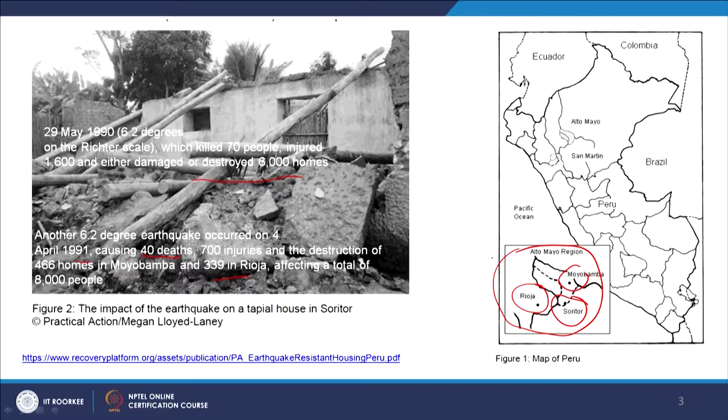This work has been carried out with the Practical Action group, which focuses mostly on the recovery process, mainly long-term reconstruction rather than short-term relief.

How did they account for the beneficiaries? Based on various surveys and feedback from local residents and leaders, they calculated the whole expenditure and conducted a needs assessment, then identified the potential beneficiaries.

From the architectural aspect, after consultation with local leaders and various stakeholders in the region, they decided to discard the use of rammed earth and adobe, promoting the Quincha timber frame instead as a better earthquake resistant material. The Practical Action group developed a plan with timber posts in between, called Quincha Construction.

This involves timber studs embedded either in the concrete bedding or deeper into the foundation. The whole wall works like wattle and daub: a bamboo screen is woven, then a first coat of render is applied, followed by a second coat of render on the bamboo screen.

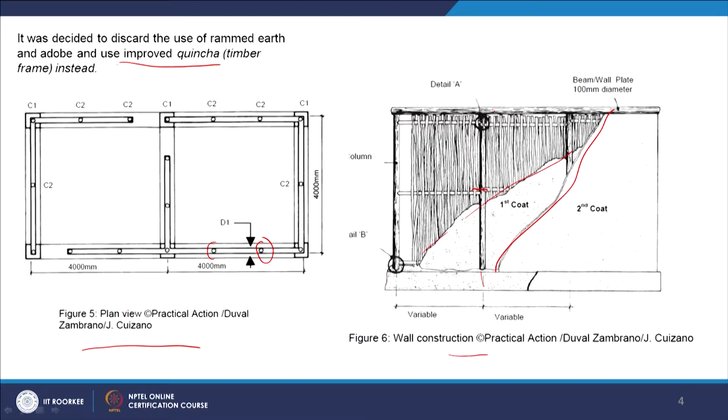If you look at detail A, this junction and this junction, so these are the two junctions. Now you have the 100 mm diameter, and the horizontal stud is embedded within it, and there is also a recess at the bottom, so it goes into the wall base, as well as 50 mm diameter, so it fixes the horizontal stud as well. So this is the kind of detail that has been implemented.

The technical group also suggested various specifications: concrete pad and strip foundations should have a mix of 1:10 cement plus aggregate, plus 30% of large stones, and concrete wall base with a mix of 1:8 cement and aggregate, and wood of structural quality poles.

In the render, again they have mixed the first coat of mud to straw, which is 100 kg and 50 kg, and the second coat is cement to lime, sand, or sieved soil as per the standards. So this is 1:1:5, or cement to gypsum sand. This is again all by volume.

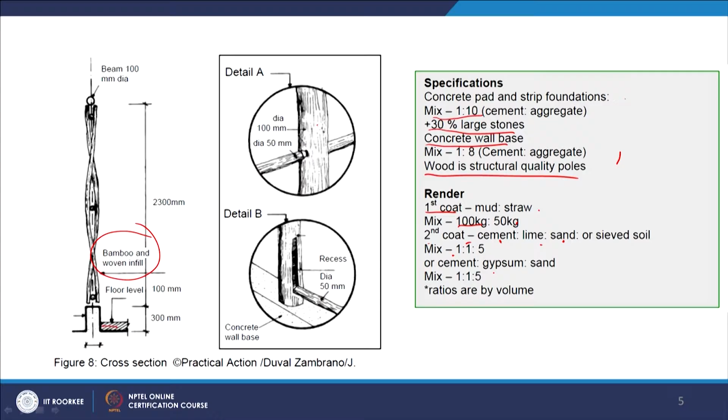And what are the benefits of this Quincha construction? One is they have upgraded this type of construction and also embedded the concrete aspect, the concrete foundations. They provided the concrete foundations, which can give greater stability towards earthquakes.

Then the wooden columns are treated with tar or pitch to protect against humidity, concreted into the ground with nails. You can see here these nails have been embedded at the base to give extra anchorage, and concrete wall bases are used to prevent humidity affecting the wood and canes in the walls, and similarly careful jointing between the columns and beams improves structural integrity.

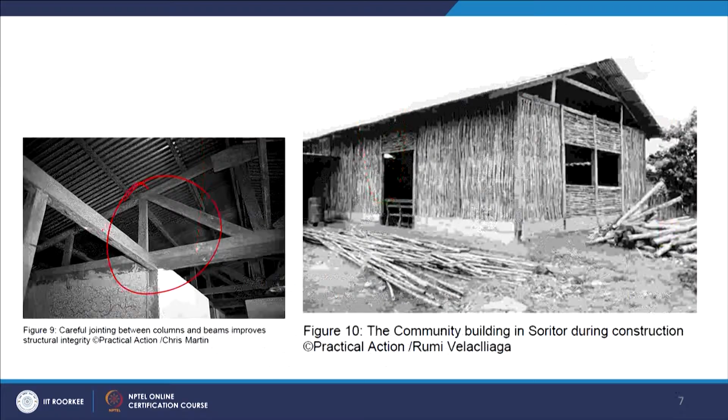That is where you see in the next slide the joining of the beams and columns, how carefully they have done it, because that is where it ties the whole building in, and makes sure the whole structure acts better in terms of the earthquake, when an earthquake happens.

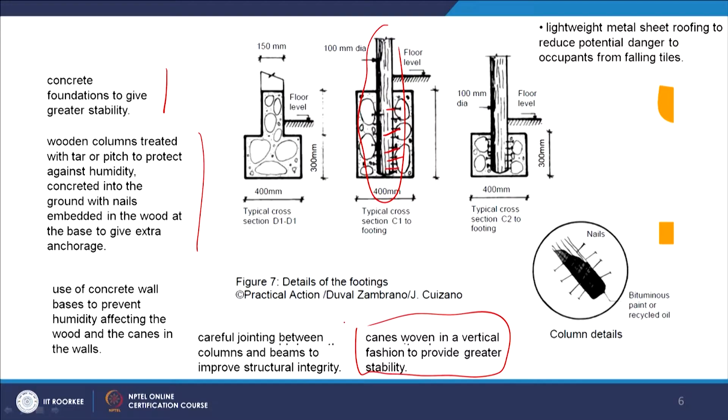And because the canes are woven in a fashion, it not only gives the aesthetic character of it, but it also gives a kind of structural stability.

In terms of roof, there has been a lightweight, probably galvanized metal sheet roofing, to reduce potential danger from falling tiles. Earlier there were tiles or Adobe roofs, so when the building shakes, the stones used to fall down on the people. That is why they thought of going for lightweight materials.

What you can see is a community building in the Soritor area. What they did was try to upgrade this technology. First, they tried to construct public buildings like schools or community buildings, so that people get some awareness of this technology, and they could also train the local people.

They could also give some training sessions or masonry training sessions to the local people, so that it could be spread out to other places as well. The way they developed it is basically 20 to 40 people in a team, and then they start working, they get training, and they have been implementing it in different sites. So this is how the methodology has been done.

Now you have the identification of the beneficiaries and the first contacts. Then you have the characteristics of the beneficiaries, how one figures out these beneficiaries.

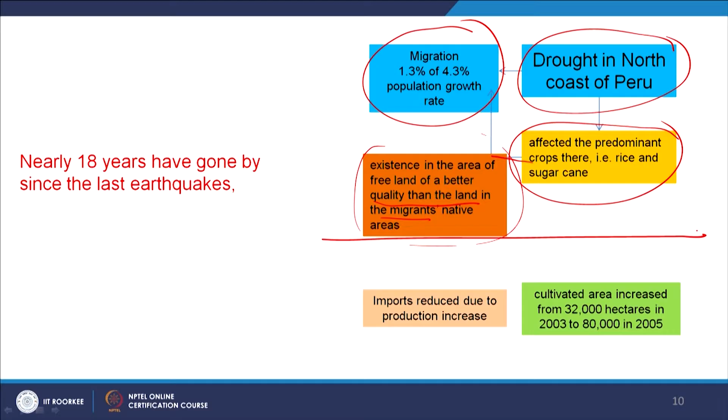About 1994, when we see the migration, out of 4.3% population growth, 1.3% was contributed by the migrant population. Considering these conditions, the government was motivated and encouraged to enhance the production of feasible cultivated areas. So that is where they also promoted certain schemes and encouraged people to work on the possible cultivated areas.

So from 32,000 hectares in 2003, it became 80,000 hectares in 2005. It has more than doubled, and that has actually increased production, and obviously imports from other places have decreased. So this is one of the important considerations, because people are getting a better economic status.

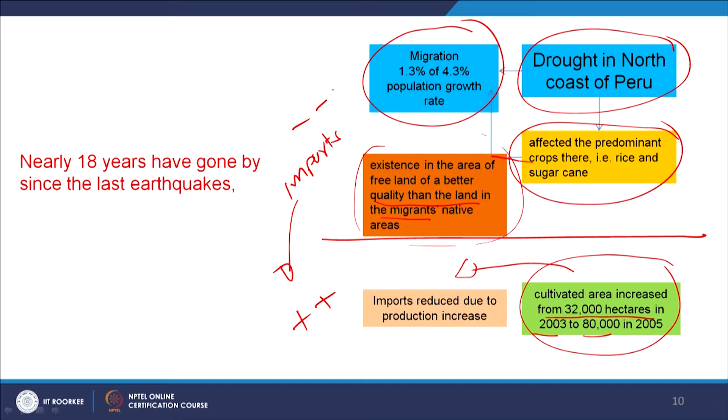So now, though initially it started with a very participatory approach, because the economic status is making them independent, they are able to take some decisions on their own. And earlier local government was not playing a part, but now gradually local government has also taken part in the whole process, and the economic status is actually supporting that.

They have not concentrated much on the public spaces. So the migrants have also created problems. They started settling down on plots and outskirts of the towns, increasing their savings, and thus creating a demand for more housing.

The more migration is started coming up, that is where the demand of housing and services increases, which means they're forming new settlements without any previous planning.

And this is where one of the important aspects is deforestation. It says 1.33 million hectares have been deforested with this migration process, and nearly 27% of the total area has been affected.

This comprises 27% of the total area that has been deforested. And now that is where we are talking about the indirect impact on climate change aspects, which may result in the shortage of water, which will again turn into a cycle impacting agriculture.

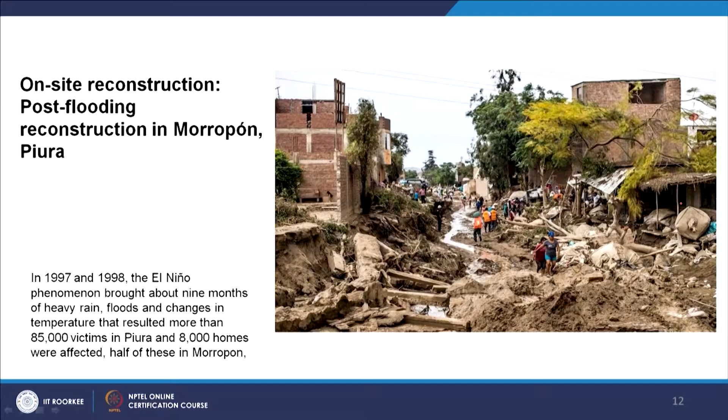Being an agricultural sector, this particular region is rich in agriculture. So in the reconstruction process, they looked at how to prevent further water shortage, and dams and irrigation projects have been built.

Also for housing, the construction system used concrete foundations with 1 meter footings to prevent possible floods, built with improved Quincha. Again, they used the Quincha timber frame with the active participation of the local population and materials.

So even here the participation has been incorporated, using local materials. Now, being an agricultural area, the whole idea of urban planning is to reduce the vulnerability and centralize water and services, and this is where all the housing complexes are built on about 200 square meter plots.

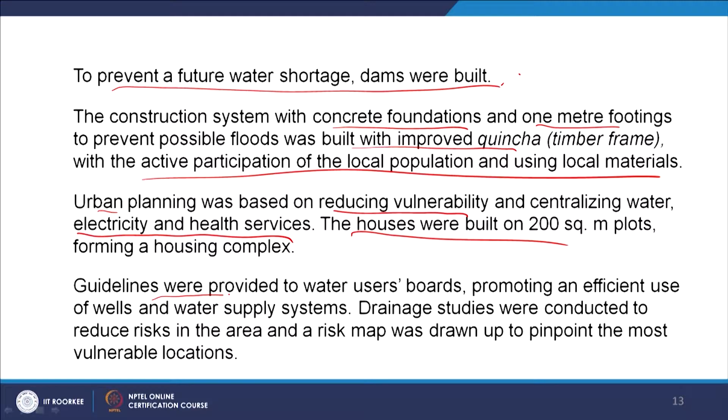They have also been provided with certain technical guidelines on how to use water, and promoting an efficient use of wells and water supply resources.

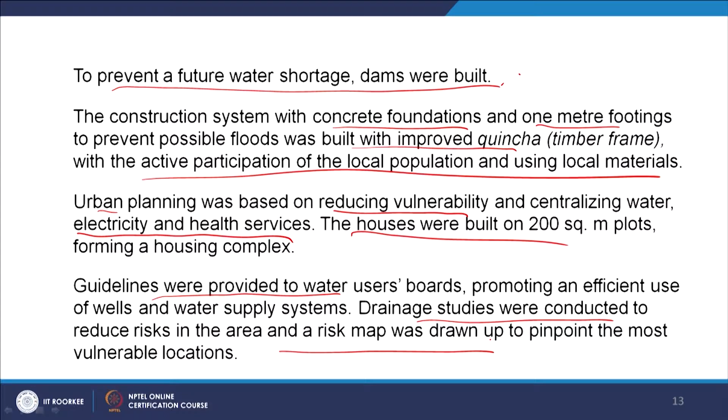Risk mapping has been done through drainage studies, and they also identified certain vulnerable locations, which have been communicated to the people. This is how they mostly emphasized the water segment and irrigation services aspect.

Now what happens here. Today, in this area, the situation is very colorful and very cheerful.

One is people have planted flowers and made their small gardens, and they also developed their own system adapted to the local conditions. Because they had a tin sheet, with this advanced, upgraded Quincha system, they have also adopted certain local techniques and tried to modify their dwellings.

So that is where, in any response, personalization is a very natural response to either climate aspects as well as cultural deficiencies.

So the fronts have been taken care of because they have painted various murals with drawings like birds, mermaids, geometric figures. This actually shows they have made them into private gardens.

They've looked into the green concerns of it. This shows that the community's self-esteem has been considered very much, and that is how the participation has ensured that they have taken this self-esteem forward.

I'll also discuss the third case, which is an on-site reconstruction, post-earthquake reconstruction in Chuschi and Quispillacta, Ayacucho. This is an Adobe house.

What they did was adopted, because in all these 5-6 settlements, poverty is one of the common factors. And here what they did was try to train them in making Adobe square blocks and train them in making these Adobe houses.

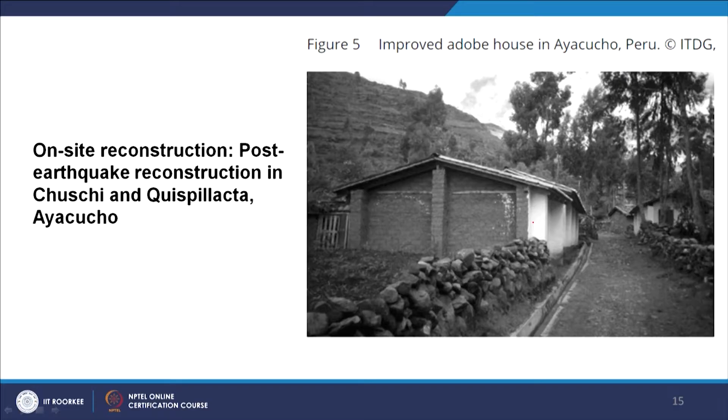And how to make some improvements on it. Again, here also they consulted the people on what kind of beneficiaries, and involved all the people in making these houses and everything.

But what we see is there have not been many improvements made in public areas. Like you can see, the streets have been gradually deteriorating, the stone paths have not been cleaned with uniform paving, and ditches have not been cleaned.

So which means this is where there is a negligence on the public space itself. But one interesting thing is people have invested the time and effort to actually make this particular carved stone church in Quispillacta, because this is one positive sign of it.

But somehow it has not been taken into the overall scheme, how the same energy could have been better used here in making this. So this is one thing we can learn from this.

So why does it happen like this? Because people have become dependent and have lost their dignity and self-esteem, because the state institutions have been providing them whatever they needed. So in that way, the participation aspect has gradually come down, and they are almost becoming mostly dependent on state institution support, and either they are looking for any kind of external support or cooperation.

The traditional form of community work was called ayni, which is a kind of give-and-take process in the South American continent. They have this traditional system, but it has gradually been destroyed, and the efforts, actions and intentions of development have been wasted. So despite having this kind of energy, they were unable to invest it holistically.

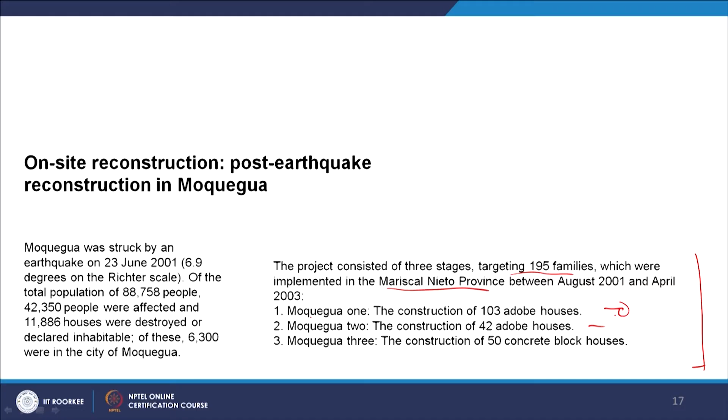They targeted about 195 families, implemented in Mariscal Nieto province between about 2001 and 2003. In Moquegua stage 1, they constructed about 103 Adobe houses, and again 42 houses in stage 2, and in the last stage, 50 concrete block houses.

So here what happens is they have also looked at involving the community in the recovery process, and they also made some modifications according to their needs. And what you can see here is this has been very successful.

But here, because of the mining aspect, the local government also received some mining fees, which in turn has been used to provide city services and make investments in the community. So there is population and community participation in controlling and efficiently planning the distribution of funds. So mining being one of the richest economies also supports and facilitates these services.

And both the houses of concrete blocks as well as Adobe remained in good condition, and in both cases it has been technically guided and they remained in good condition.